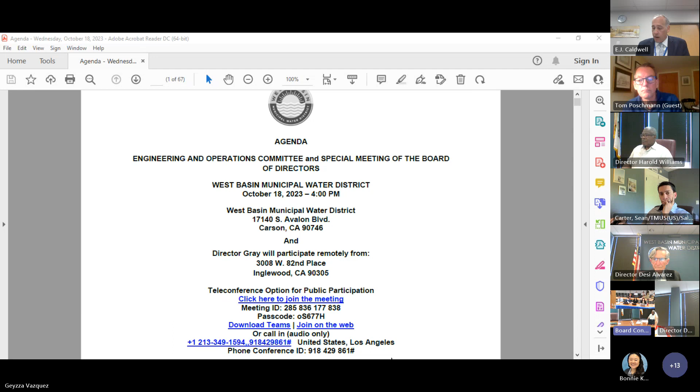Yes, Mr. Chairman, we did receive an email correspondence from Mr. Sean Carter, I believe on the 16th. That letter should be before you for those that are here, and we have emailed it to the entire board as well. We received a follow-up letter on October 18th earlier today. He had put in a request for some documentation, but has since withdrawn that request. However, as I mentioned, he did submit a request to speak on public comment today, and to my knowledge has not removed that request. So if Mr. Carter is here today virtually, our normal time allotment is 3 minutes per person. If you'd like to speak, please indicate so now.

Yeah, correct. I'm Sean Carter. I joined virtually just to clarify exactly as you said that we have no objection to the bid result as stated.

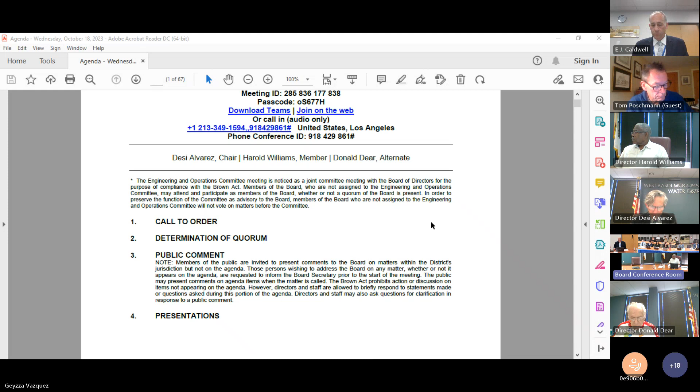So we'll move on to the action calendar, and the one item we have today is the replacement of the Phase 5 filtration membrane modules. Mr. General Manager, would you like to introduce that item? Yes, thank you very much, Mr. Chairman. As you mentioned, the item before us is action item 5A. For this presentation, we have Susanna Lee, our operations supervisor. Thank you, EJ, and good afternoon, committee members and Chairman Alvarez.

As this item has already been talked about briefly, it is before you regarding replacement membrane modules for our Phase 5 filtration system. As the board is aware, West Basin produces advanced treated recycled water for both our barrier systems and the Chevron boiler feed at ECL. Beginning 2017, West Basin began to rely more on both the Phase 4 submersible membrane system as well as our Phase 5 system, providing pre-treatment to the RO membranes for both the barrier and Chevron.

Phase 5 membrane filtration system was commissioned in 2013 and was originally fitted with the original equipment manufacturer, OEM, membrane modules from Pall Corporation. With the expansion project in 2019, there were an additional 2 racks of membranes installed, and now currently there are a total of 1,120 filtration membranes for the Phase 5 system.

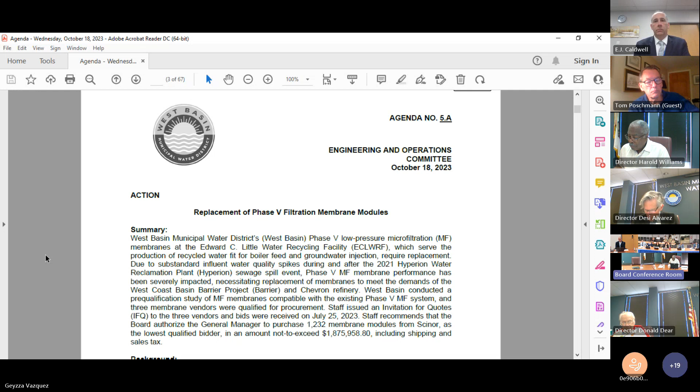And as I mentioned, the membranes were subsequently replaced in 2019 as part of the expansion project. At that time, Pall Corporation membranes, or the ARIA Asahi membranes, were the only qualified membrane vendor. In the last 10 years, however, the low pressure membrane industry has grown significantly, resulting in an increased number of low pressure membrane suppliers in the market. So West Basin has been conducting pilot studies and testing for multiple low pressure membrane modules since 2015 for various West Basin recycled water applications. Staff also established a standardized membrane pre-qualification process for West Basin in 2022.

As you recall, in 2021, we had a pretty significant upset event at our main plant. Both Phase 4 and Phase 5 systems were required to continue operating during that time to provide production for the barrier and Chevron systems. The Phase 4 system membranes have already been replaced. At this time, the Phase 5 filtration membranes installed in 2019 have shown significant decline in performance since the first quarter of 2023. Hence, at the beginning of this year, our barrier production remained relatively low and has required labor-intensive membrane pinning activities throughout this last half a year.

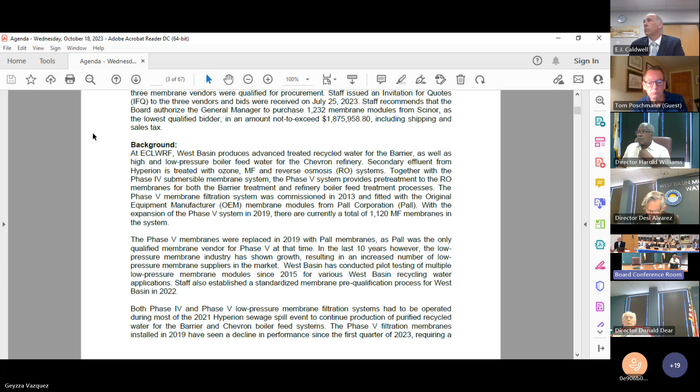While the membranes were originally slated to replace at the 5-year milestone, staff is expediting and requesting procurement for new membranes to replace the lost production capacity.

As I mentioned, we established the pre-qualification process in 2022, and completed that process in April 2023, resulting in pre-qualifying 2 new modules for the phase 5 low pressure filtration system. Table 1 lists the key specification criteria for each membrane and the pre-qualified vendors.

We subsequently finalized the phase 5 membrane filtration procurement specs in June 2023, and issued an IFQ for procurement on July 27, 2023. Bids were due in July, and staff received 3 bids from the 3 pre-qualified membrane suppliers.

Because the membranes are fitted with different product sizes and membrane areas, the winning bid was determined based on the lowest price per square foot. Table 2 lists the results for the bids.

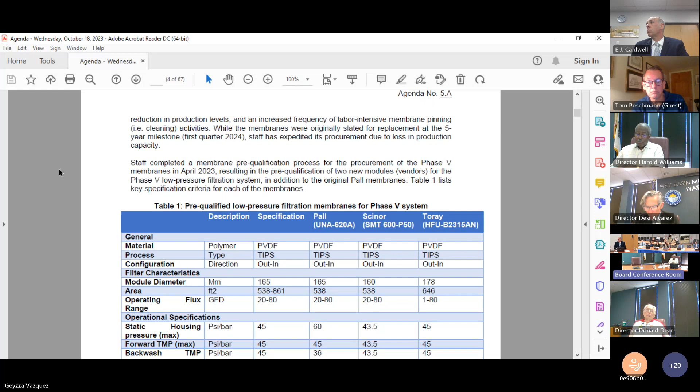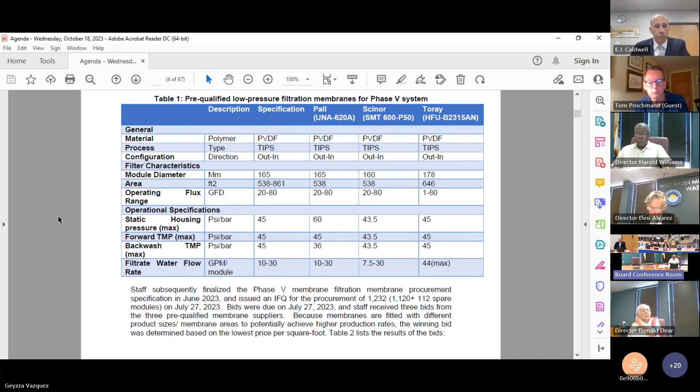As Table 2 indicates, the low bidder is Scinor, with a total price of $1,875,958. I do want to point out a typo in Table 2 - the freight charge for Scinor should be $61,500, so that will be corrected before the board meeting.

Scinor membranes were tested as part of the 2018 work project 4906 and have met the requirement. Staff at this point is recommending the board authorize the general manager to enter into agreement with Scinor.

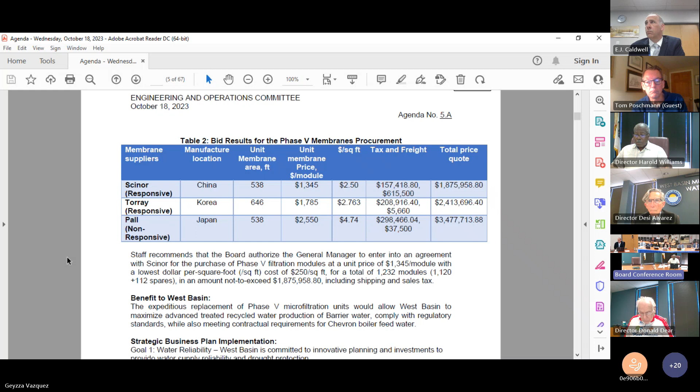Staff recommends that the board authorize the general manager to enter into agreement with Scinor for the procurement of 1,232 phase 5 replacement modules for a total not to exceed amount of $1,875,958.80, including shipping.

Any difference in quality of the 3 products? Throughout pre-qualification testing, quality was assessed. We determined all 3 are qualified.

Director Williams, do you have any questions? Just in general, were these bids open and read aloud in public? I don't know that we shared them initially, but we have discussed them at length, and of course they're included here in the board memo. We published the bid tabulation.

Sometime in September. Any objections received? We have not received any that have not been withdrawn. Thank you.

Director Dear, do you have any questions? Director Gray, do you have any questions? No, I don't. Thank you, Chair.

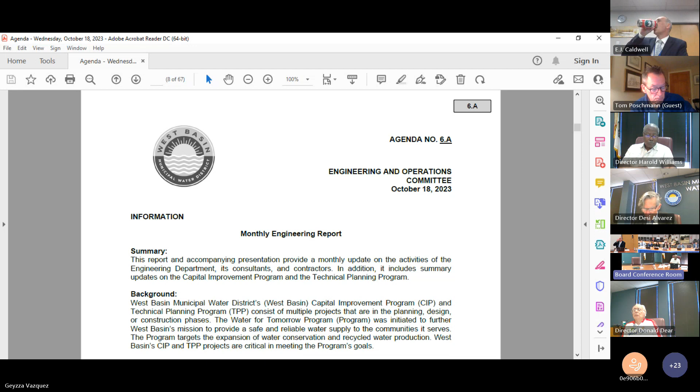Thank you, EJ. Good afternoon, Chairman and members of the board. Please turn to page 12 of your agenda packet. I'm going to give you a brief overview of what's coming in November. I have staff here with me, and we're going to talk about progress of the projects that went on in the month of September to October. Next slide, please.

In November, we're going to be coming back to award a contract for construction for the VFD rehab project, the actual award of the installation of the VFDs. This bid is due in today, and we will have results analyzed shortly, but preliminary, we have several bids that are below the original construction estimate from the design consultant. So it looks like we've got 3 bids to take a look at, and we're pretty happy that we were able to get 3 bids on that.

Next month also, we'll be coming back to award the Palos Verdes recycled pipeline project, the pump station construction award. As you're aware, the project was divided into 2 different parts a while back to be able to proceed ahead with the project, and the second part is pump station, which we'll be awarding next month in November.

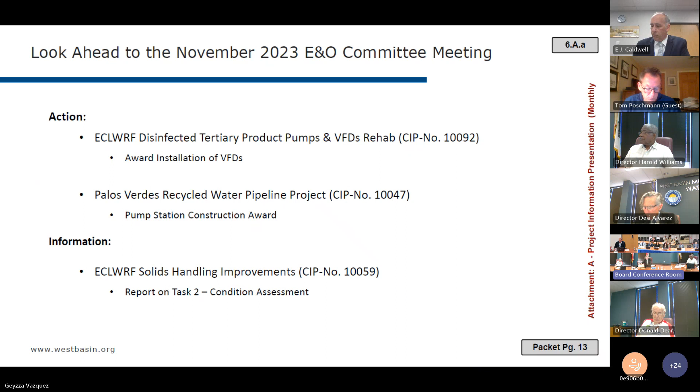Next slide, please. I have Veronica here, engineering supervisor, to give you an update on the PV recycled water. Good afternoon, directors, Chairman Alvarez. Can you please pass forward to the next slide? So these particular slides are highlighting some of the changes.

Some of the slides are becoming more typical every meeting, and to minimize the time we go through these, the changes are highlighted. One of the good news on this one is that the contractor was able to obtain the encroachment permit, which they applied for on July 31st, and we obtained it on September 28th. So that allowed the starting of construction work on the streets. The contractor has already been hauling along the alignment, starting at Calle Mayor and Anza in the first trench.

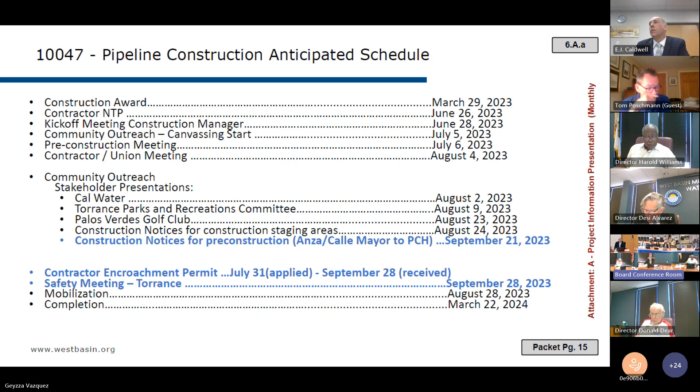If you can please move forward to the next slide. They've moved forward into PCH. Okay, so the next slide.

One of the items we have also maintained track of is RFIs, requests for information, which are being responded to as they come in. This slide is updated as of October 5th, 2023, and these were the numbers at the time. They'll be updated next month, but right now we have used 101 calendar days out of the 270 calendar days of construction. We haven't gotten any invoices yet, so the budget sheet hasn't been updated, since we're still waiting for those invoices to come in.

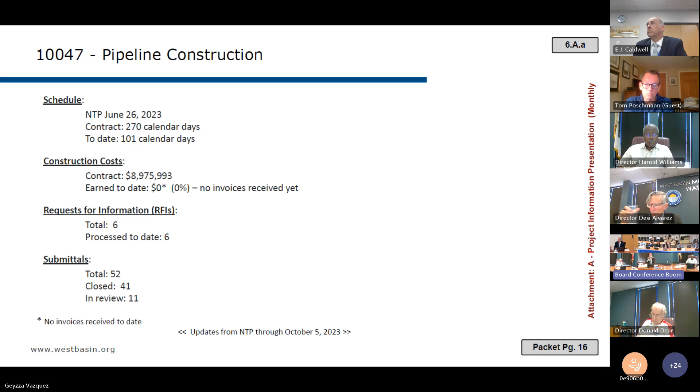On the next slide, please. So this is basically some photos of the construction activities starting. You can see on the upper left photos of some survey going on for the alignment, and the other photos are basically of the potholing that is ongoing on Anza.

In order to notify residents of the activities that were going to happen, we issue construction notices to areas where we were going to be doing more visual work, where people would be able to see us. So the first area that we started construction was from Anza and Calle Mayor to PCH.

Right now the contractor is moving past PCH. They're going into Montana. They're going to be potholing PCH this week at nighttime. There was a meeting with Caltrans inspectors, and the inspector allowed the potholing to happen at night, so that's going to happen tomorrow and Friday.

But the rest of the potholing is happening during the day. The idea of having this potholing in advance is that if we see a potential interference with the pipeline alignment, we can always make the corresponding realignments with the design engineer and try to minimize impact for utilities that are in the way.

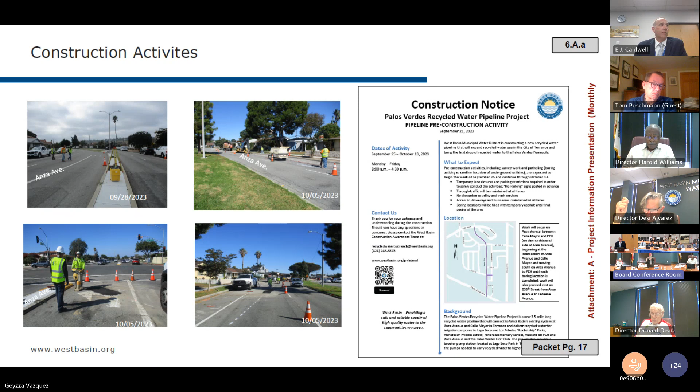This is, again, because the construction is basically rolling into the activities. We are still in the process of generating the numbers for all the workers that are going to be working on the different tiers for this project. However, this updated slide highlights the letters of assent received for this project. I believe there's only one missing, but those are needed before that particular subcontractor starts working, so the work of that contractor will be coming much later.

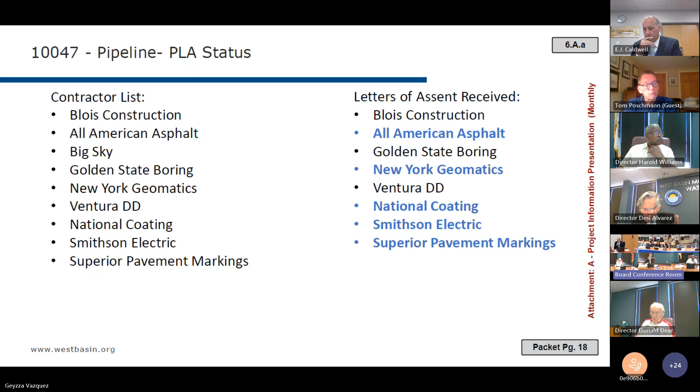Into the next slide. This is just an anticipation for the construction of the pump station schedule. We are still on schedule, still in the bidding process. We're expecting to receive bids on October 31st, which is just around the corner, and our anticipation is to come to the board in November for the construction award. In regards to the pump station completion, it's estimated to be May of 2024.

There are some long lead items that contractors have notified us about in regards to construction timing, which we are assessing to maybe give a few more days for the construction to be completed. So that's the asterisk on that May 2024 date, that it might be extended. That's still to be issued and finalized.

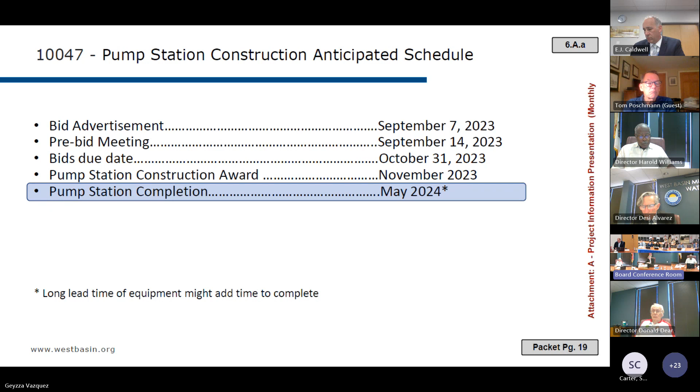All the information we received from LA County Flood Control District is that they do require a covenant document from the city of Torrance to maintain their easement and access to their utilities. And for SCE, because this is a new utility, they're basically asking for an easement.

So the city of Torrance has reviewed the information. They are good to go on the Southern California Edison easement. On the covenant, they are in the process of reviewing the language between the agreement they have with LA County Flood Control District and the language they have with West Basin, to address whether they need to give access to LA County Flood Control District for their utilities. If we receive any language for modifications to the agreement, we'll bring it to the board and have legal review it to make sure the language is compliant.

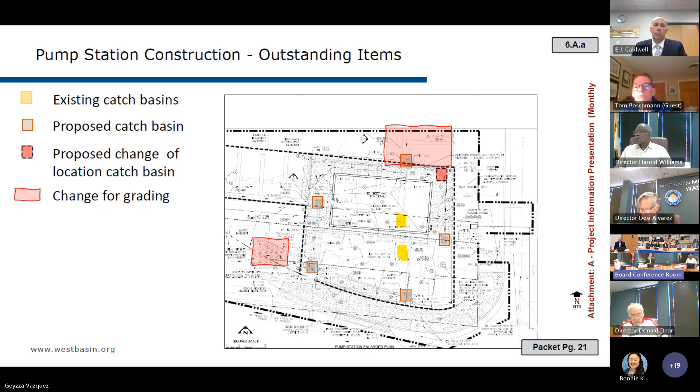Yes, so you can see on the right upper hand those catch basins. They're basically open. The booster pump station will be right on top of that. So we need to lower those, and in order to lower those, we need to install other catch basins in that area.

Okay, thank you. So, are you trying to avoid a ponding problem? Are you anticipating a ponding problem? Well, no, we are basically substituting what is already there by installing these facilities. So the catch basins currently on the design are basically taking over for these two existing basins. Okay.

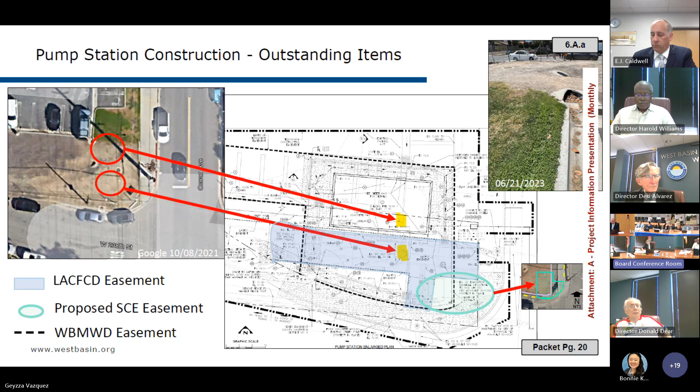And then I believe that was the end of the presentation. You can maybe forward to, yeah, thank you.

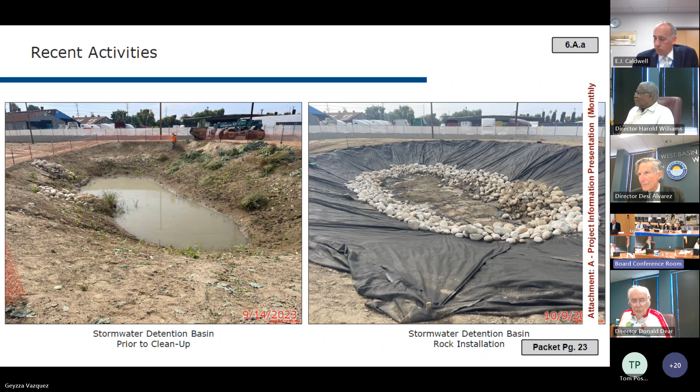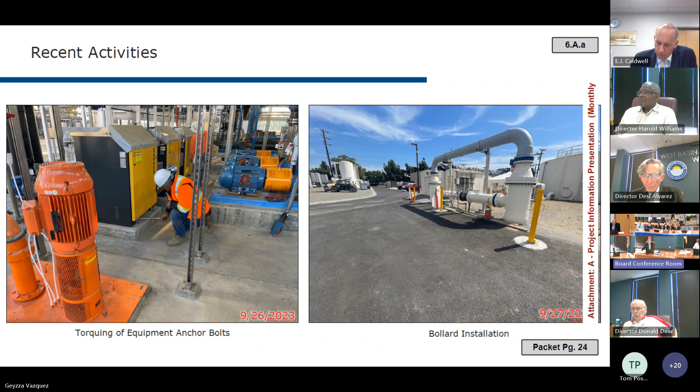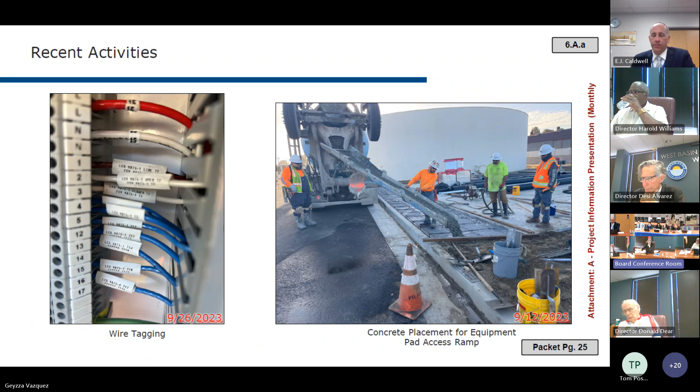On the left is the wire tagging. The wire tagging, cabinet labeling, and conduit labeling are some of the punch list items being done right now. The majority of the construction is done; the actual pulling of wires, landing and terminating has been completed, and we're testing each connection and piece of equipment associated with it. Part of the remaining work is correcting some of the wiring tag labeling. On the right-hand side is an equipment pad placed earlier, a concrete equipment pad outside of the product water tank that was placed earlier this month.

To go over the contract: it has 724 calendar days, and we're at 834. The contract cost was 22 million; we're about 20 million. We received 336 RFIs and have processed 334 of them. We had a total of 377 submittals, and we have processed 372 to date.

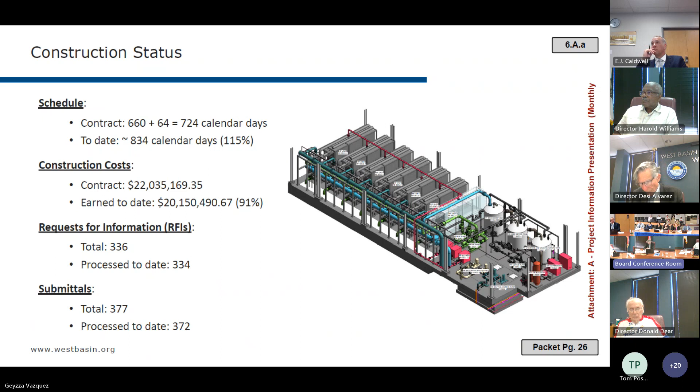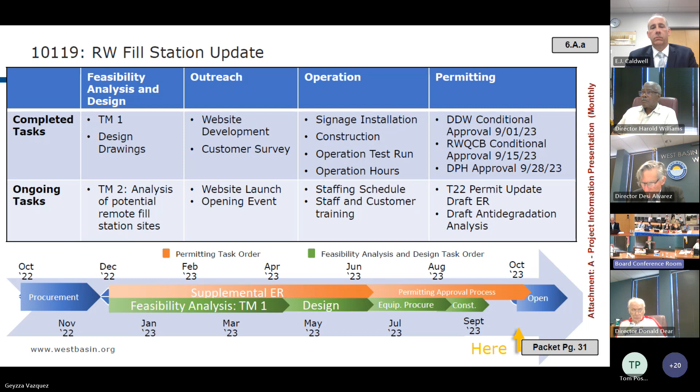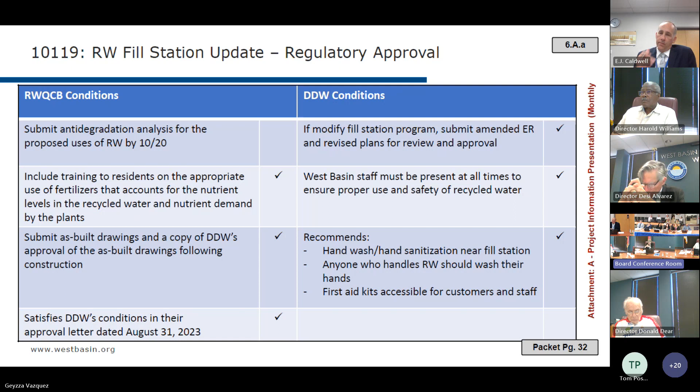This anti-degradation analysis is a larger effort because we're trying to capture the need for the analysis for the Palos Verdes recycled water pipeline as well as the fill station project all at once. It's a larger effort, and we're working with the consultant to ensure we communicate that effectively to the Regional Water Quality Control Board.

On the next slide, the next steps focus on this anti-degradation analysis. We'll prepare and submit it to the Regional Water Quality Control Board, then await their approval. We have already fulfilled the other conditions: we sent the Division of Drinking Water a copy of our as-built of the fill station, which they approved, and then we sent that approval along with the as-built to the Regional Water Quality Control Board. That concludes my presentation.

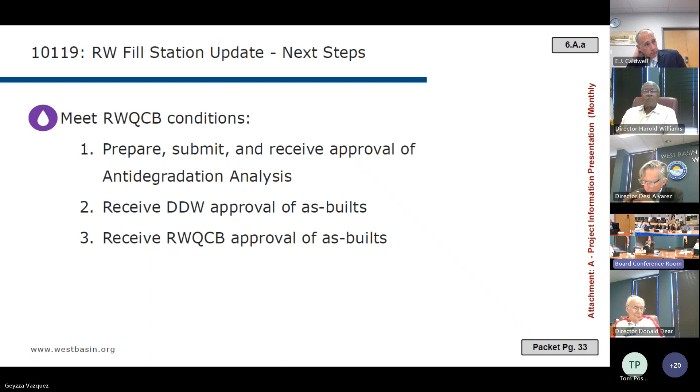So an update on the solids handling improvement project. We had the design kickoff meeting on Wednesday, August 30th. We've been back and forth on several assessments. On September 7th we completed the electrical and mechanical condition assessment. We had the first instrumentation and control condition assessment on September 15th, and the second one was held on Tuesday, September 26th.

We received the condition report, about a 50-page document, and we'll be presenting the findings at the November E&O committee meeting. We're still on track per our schedule to get the preliminary design report delivered sometime in December. Our expenditure to date is about $70,000 of the $998k contract.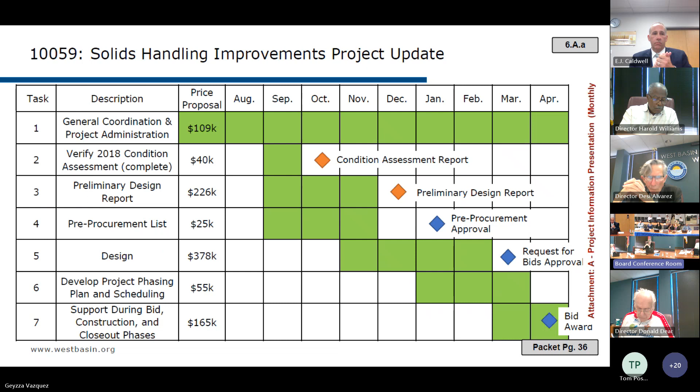These are the long lead items, most of which are sole source from the manufacturer of the original press that's out there. Hopefully in March, per our schedule, we expect to be able to request bids for the actual renovation of the device, and hopefully back in April to do a bid award. Any questions?

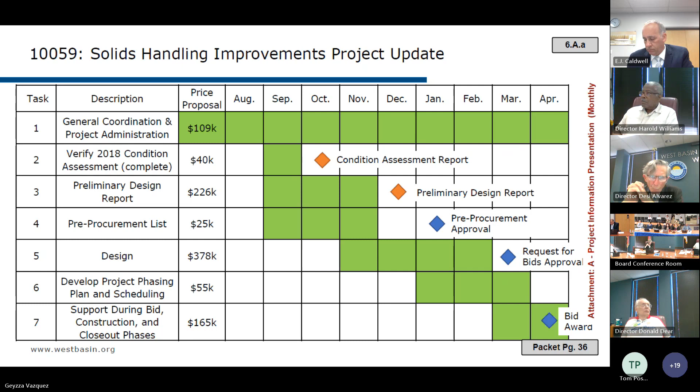Next slide, please. Okay, again, this is the list of the 2023 to 24 fiscal year CIP project budget reports. This is a monthly update. The items listed in these columns are current as of August 31st, 2023.

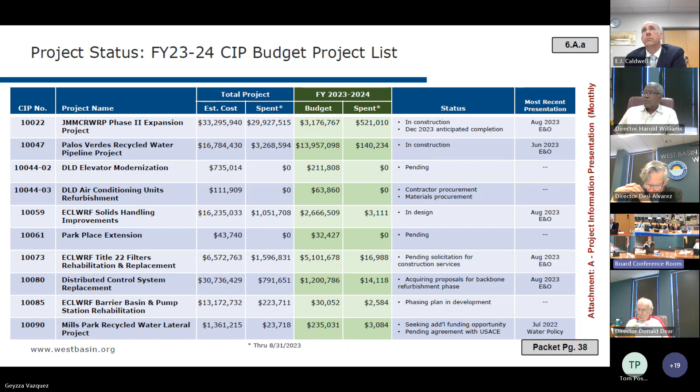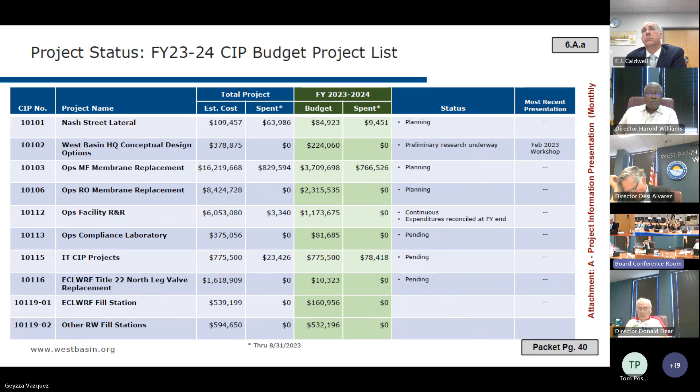Again, every project that's in the CIP is listed in this table. This concludes our report... next slide. What is that? We have one more attachment.

This is attachment B, a summary of all the vendors that the engineering department is in contract with, the status of the expenditures to date, the length of the contract, as well as other information about the vendor in this table. That concludes my report. If you have any questions, I'm free to answer.

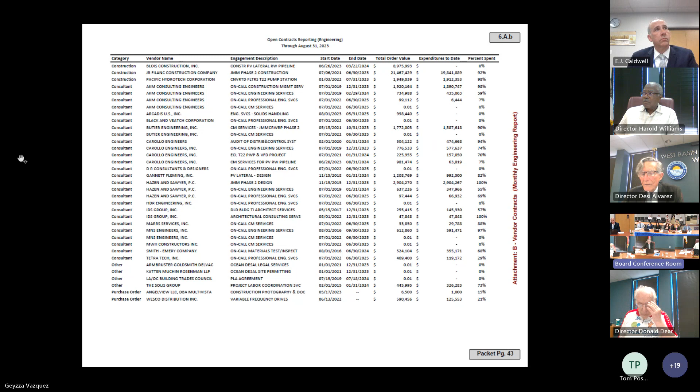Thank you. Director Williams, do you have any questions? Thanks, but no thanks. Director Dear, do you have any questions? Director Gray, do you have any questions? We'll move on. No, thank you. No, thank you, Chair. Can you hear me? Yes, thank you, Director Gray.

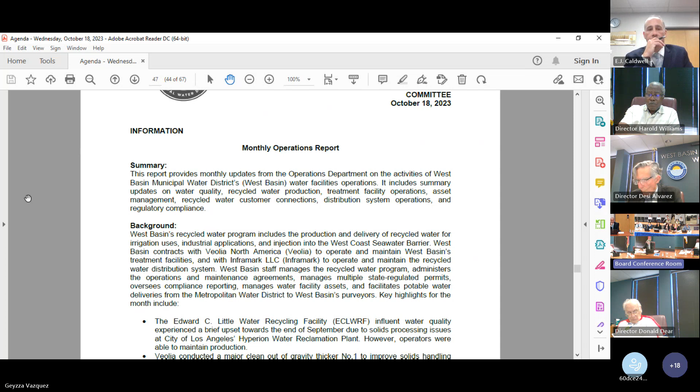Just some brief bullet points starting on page 44 of your packet. We always like to update you on our influent water quality. In September there was another small upset as Hyperion still deals with some of the remnants of their large sewer spill, making lots of repairs like lots of us, and they lost some of their solids processing. This time it was great, we had a nice call about it, an early warning, so we could adjust and maintain all of our production.

That leads nicely to the next bullet item. We did a very big effort, credit to Veolia, to clean out one of the gravity thickeners, gravity thickener number 1. As we mentioned, when we had the large upset two years ago now, we had a big inundation of solids for a very long time. That meant we saw buildup everywhere, whether after treatment or with some of the ferric and solids, and that's affecting a lot of our equipment. But we maintained and resumed a lot of our operation, and now we're really into some of the real final cleanouts.

A big effort was done to isolate this gravity thickener and get about 30 different trucks to come in, vacuum it out, and partner with a different sanitation district to bring that waste to. That's a good effort for us to continue improving water quality. Probably by the end of the year, we'll move on to the next gravity thickener.